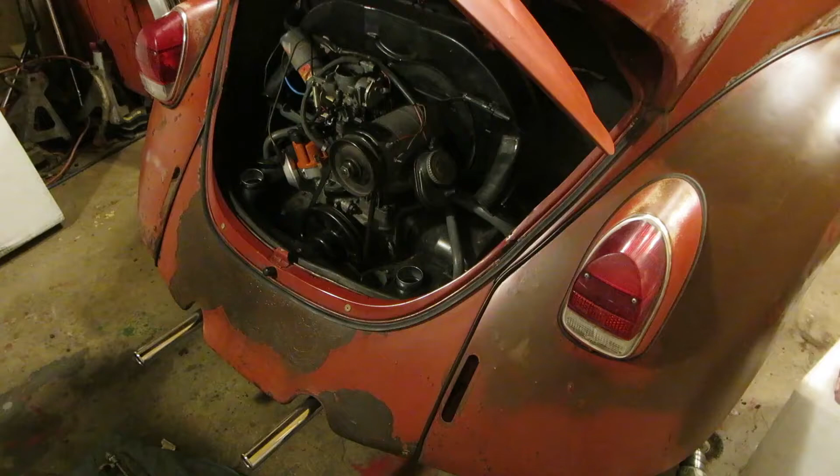This is sad, but it's funny because this is how things work in this garage. So I rebuilt this fuel pump, right? Okay, and I start the car up, and you can see the fuel going out the sides of it. That's funny right there. You gotta laugh at that, because if you cry at it, it'll make you really depressed.

So I took it all apart, right? And I lightly sanded both halves flat on a piece of flat steel, and I think they're going to require more machining. Maybe it was the beating I was giving it trying to get it apart. I don't know, but I think it was just warped, and the only thing that was holding it together was the fact that it was warped. I don't know, I don't know.

So anyways, I couldn't make it work, so I just ordered another one from Bill. It'll be here in a few days, I'll show you when I get it. But in the meantime, let's clean up this giant mess, and we'll start working on the bumper.

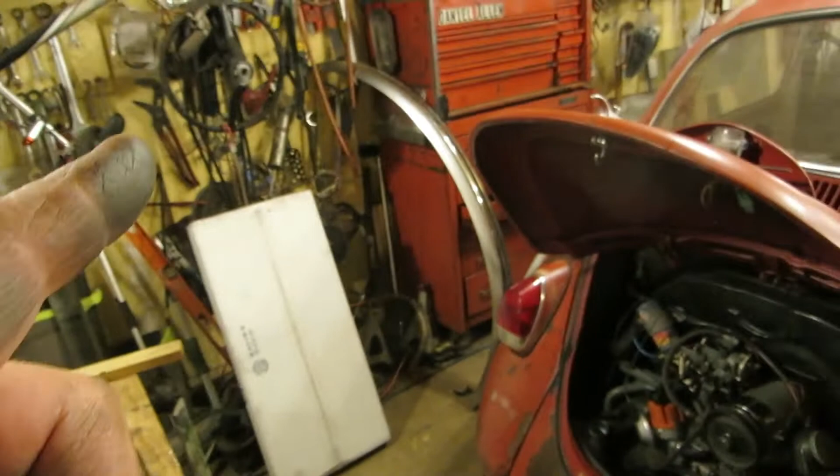And I've got a box that came today, Sunday, if you can believe it, from Wolfsburg. All right, this bumper here, I'm mistaken, it is not German, and you can tell just by how flimsy it is. The front bumper, however, is German, because it's considerably thicker, a lot better quality than this.

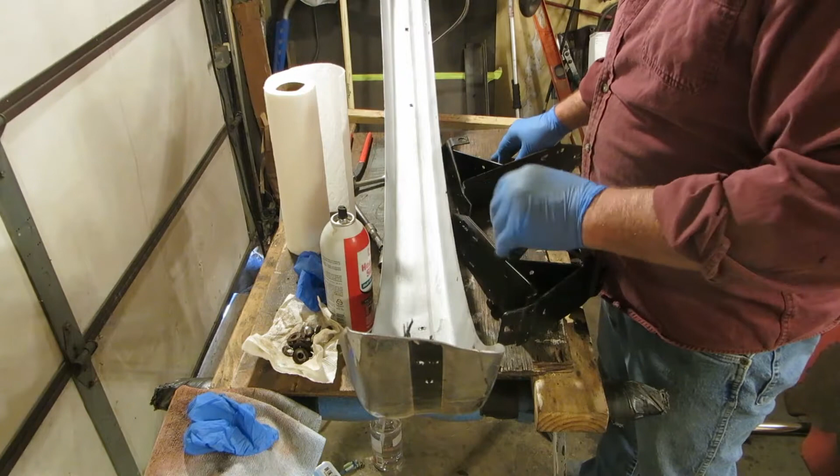This is just very light, it's almost like a piece of material for a fender. It's just nothing, there's nothing there. You would think it would be some thick stuff like this, and it's not. It just is not.

I guess it acts as... I don't know what it acts as, but I do have original German brackets. They got VW part numbers on them, and you can tell because it has the tow hook. So we're going to put this thing together, and we're going to put it on the car.

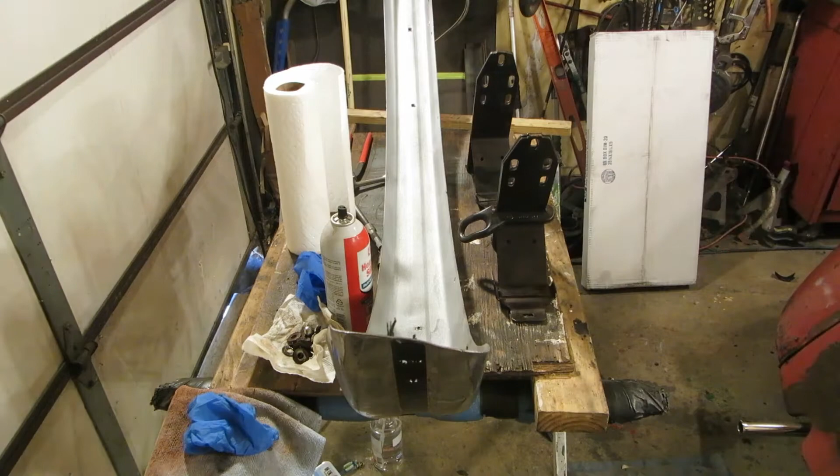It's pretty simple, just bolt it together, so let's get that done. Got the bumper on.

So nothing special about it. It fits like an aftermarket bumper though, like crap. No, it was alright, it wasn't bad.

Alright, we'll open up our Wolfsburg West box and see what we got here. Oh, I just sliced through the precious rubber. It's probably full of peanuts.

Wolfsburg was $4 cheaper on these, and they say they're German on the chrome pieces, and they say they're German. So I'm just looking and seeing if they're all dented up. Oh, they look pretty good.

Doesn't have any hole here for my screw up top. That doesn't surprise me, that I would have to take and make it work. What's it say here? Well, it's stamped. It's stamped made in Germany, well, which is good.

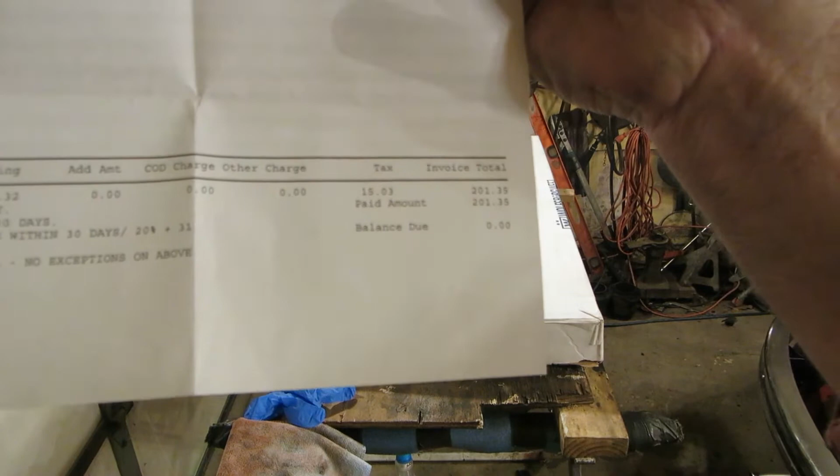Yup, everything there. Look at that price, yeah, for those little parts. $201.35, jeez. Okay, since I got my parts from Wolfsburg, I'm going to start putting my door together.

The first thing I'm going to put on is this molding right here. And it has clips, and the clips slide, so you have to get them into the door, all the while trying to get this piece lined up. It's kind of hard to do, but you can do it, so I trust you can.

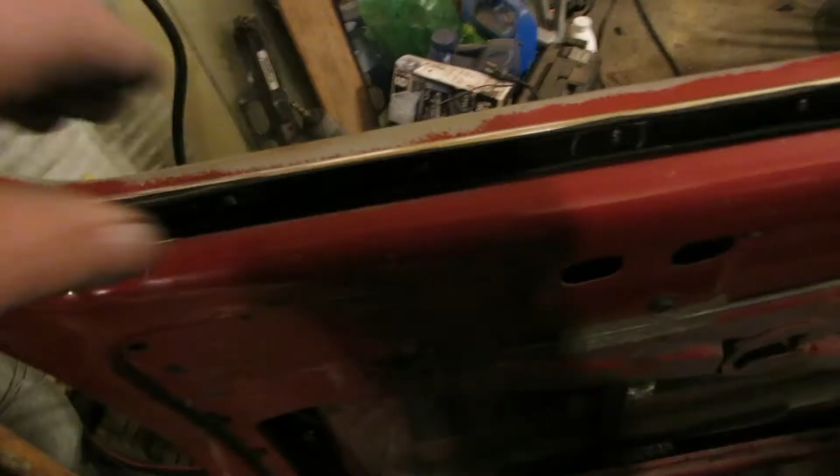It's real important to get this pushed in there as much as you can, because you don't want your glass rolling up and catching this. So tuck that in. Okay, you see when you get it tucked up in there, you have holes here, and those go for the clips. So we'll get this all tucked up in there, and I'll have to look at this screw hole, because there's no screw hole here, but there's a screw that goes up there also.

So let's get that all tucked up in place and the clips on.

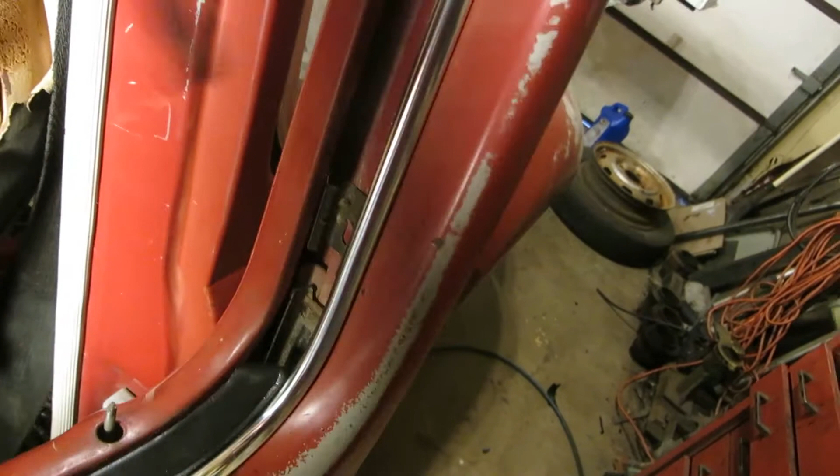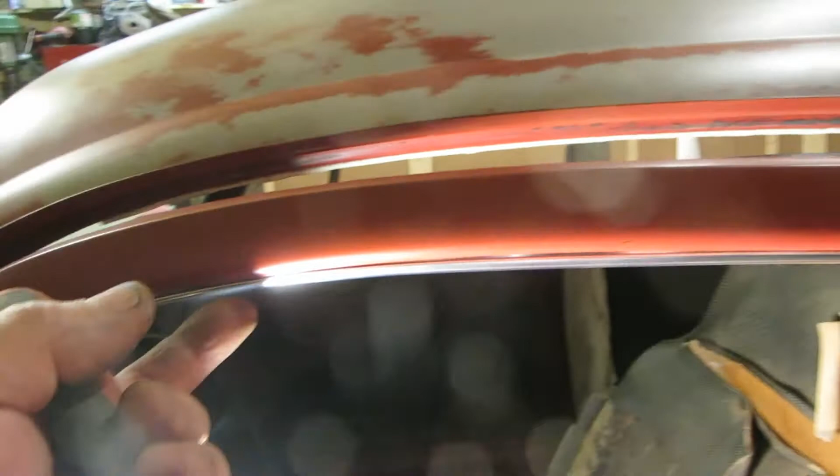Okay, these little clips, I don't think it matters which way they go, up or down. I'm doing them down because of gravity, so they can't shake out. The profile on either side is the same for the molding to stick into, and your chrome molding up here is fine. I've got to put my screw up here, but I think we're all done with that. It'll be too much of a pain finding that screw that goes up in there. The vent's going to hold it in place, so I'm not messing with it.

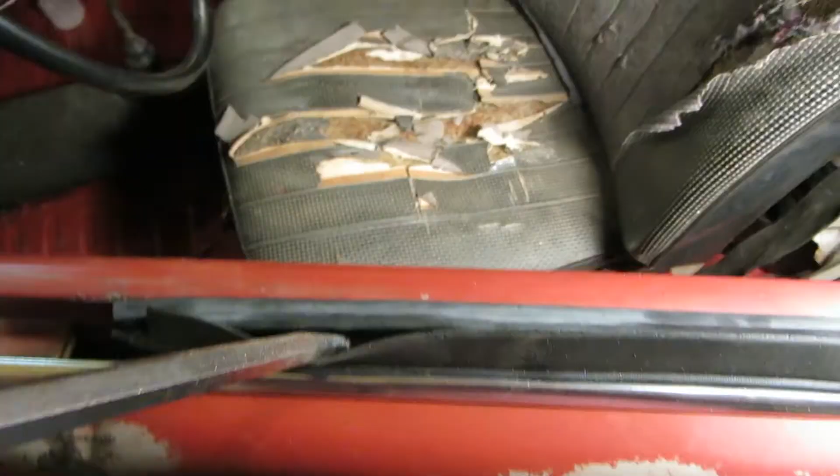Alright, if you use a flat screwdriver, you can clip these in place. They clip in really hard. So they did clip in though, so we're good.

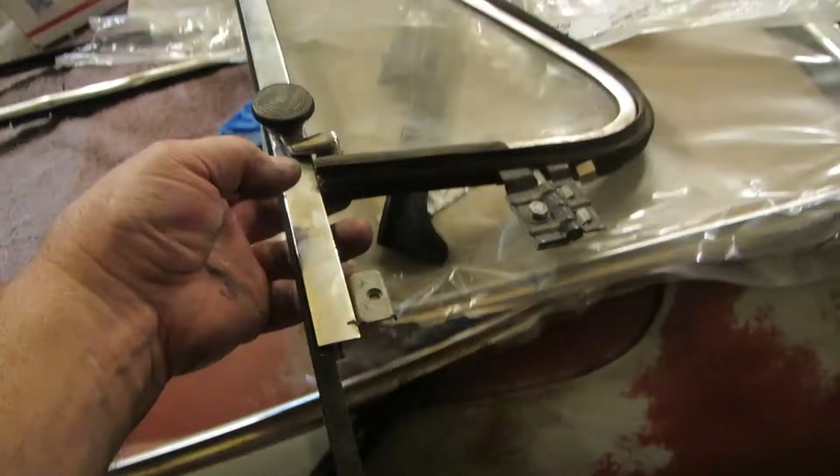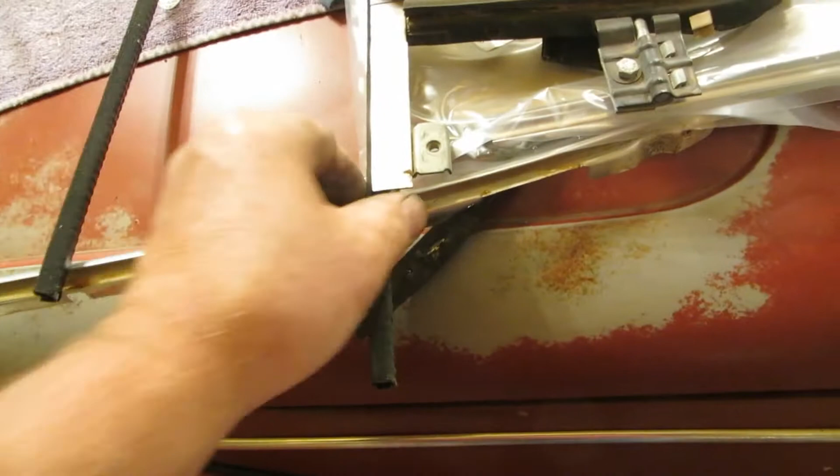Now we'll put our vent in. This is our better vent glass, and the only thing I did to this is I put a new channel in it, channel for the other side, and they've got like a little gummy surface. As long as you've got it clean and everything, the window rolling up and down is not going to move that, so you can just kind of press it in there and she works fine.

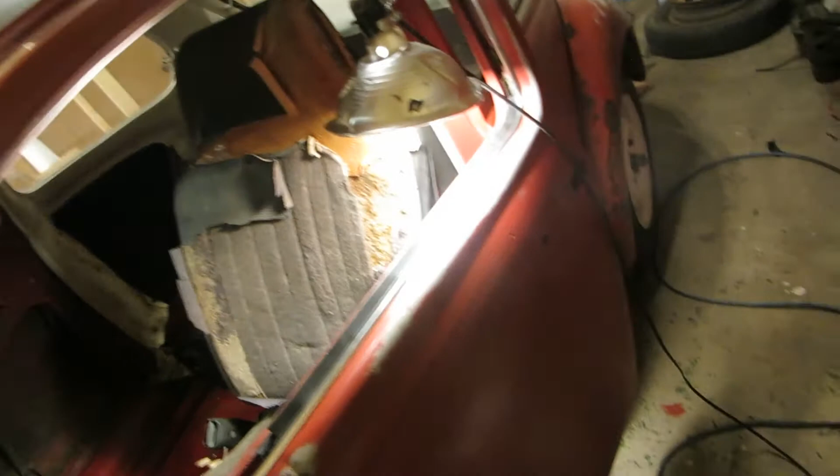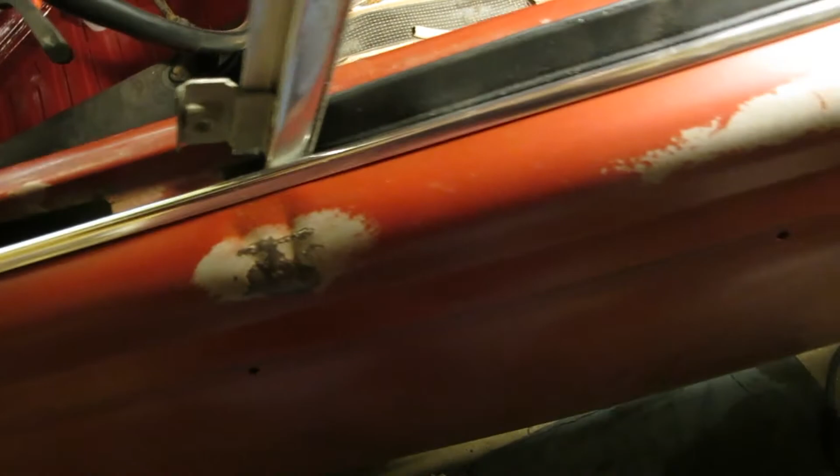And then we'll flip it around and go right there. I'm going to need two hands to do this, but we're going to kind of do one of these numbers. Careful not to rip up your rubber. So I tried to put it down in here and it just pushes this rubber away, so I've put a pair of pliers down there. It's just kind of a wedge - a wedge of wood would work just fine. I just grabbed what I had, and we'll be able to get that down there without pushing these rubber pieces away, and then when we pull it out, the door will come back together. We didn't bend it or anything, we're just kind of opening it up a little bit.

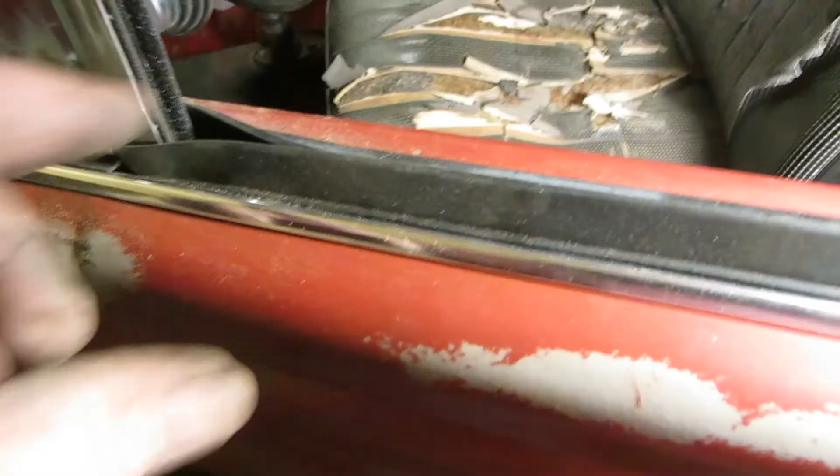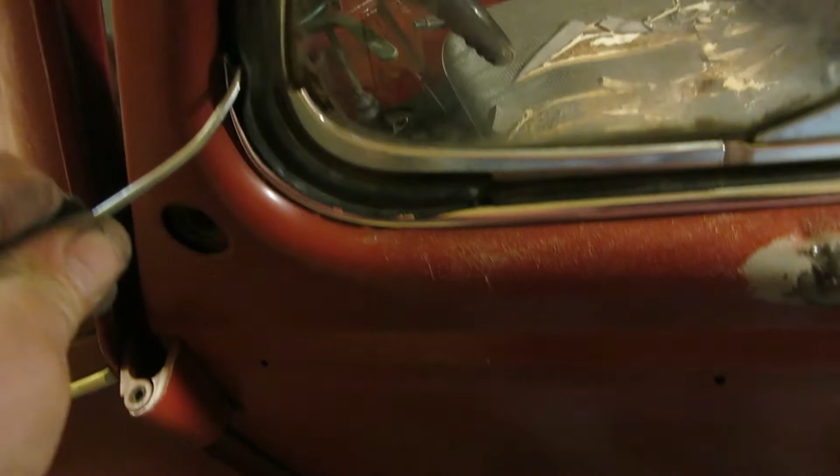Alright, there's a felt channel right there, and you want to make sure you get this metal piece on the felt channel on the outside of this. Sometimes they stick on the inside, so if you bring it up a little bit farther and fold these rubber pieces kind of out of the way with your wedge in here, you can kind of slip things down and then pop it over. Then I had another problem also with this metal molding, this chrome piece, and what I was doing is I was holding it with a hook while I was tapping this in. So, but we do have this in.

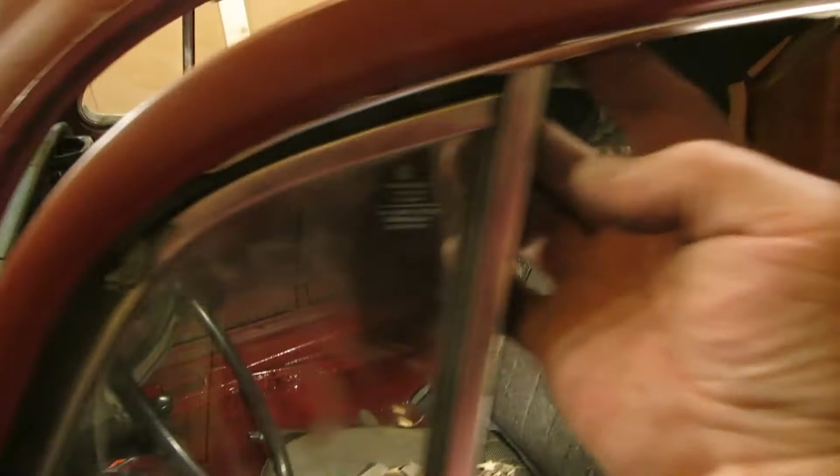And there will be a screw that goes up in there, so we'll put that screw up there, and then I can't go any farther until I get a piece of molding, which is the window channel. So once I get the window channel, then I can put that in there. Window goes up and down, I can even put the door panel on it. I'm thrilled. Well, it looks like it's time for another camera - this one's got a scratch on the lens now.

Okay, you put your vent glass in, right? And you tried to adjust it a little bit, maybe pushed it in or something like that, and the glass was loose, so you took the glass out of it. Okay, the glass came out of it. Don't freak out, okay, that's number one. Don't freak out.

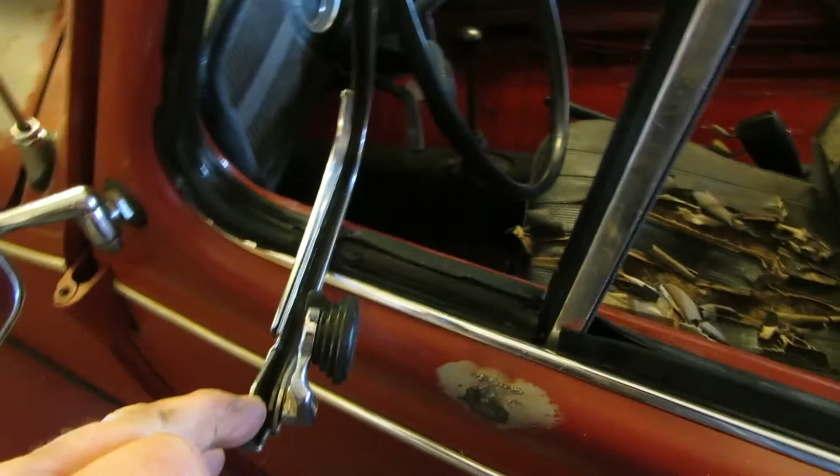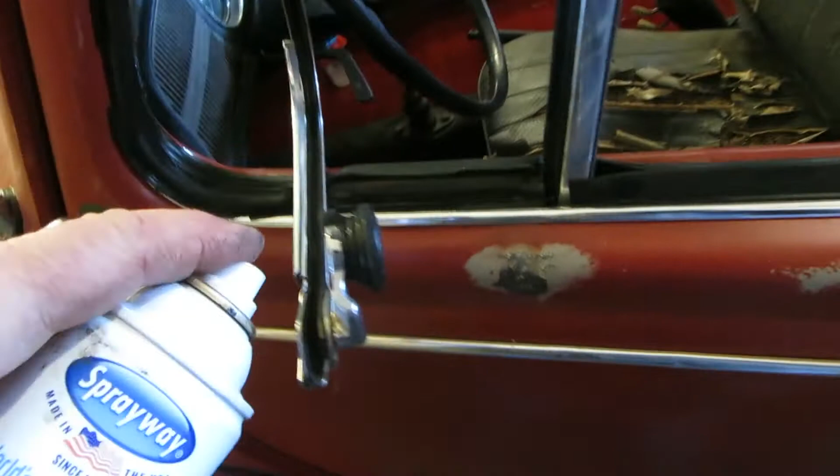Okay, what you want to do is - do not, I repeat, do not remove the packing. Wolfsburg sells new packing for it - drive that aluminum vent onto that new packing. Yeah, that's a good idea. Do not remove the packing from the inside of here. Okay, just take yourself a Q-tip and clean it out, alright? Clean it out, you get a dauber or a Q-tip or something and clean it out.

Okay, we're going to clean this and let it dry, and I'll show you what to do next.

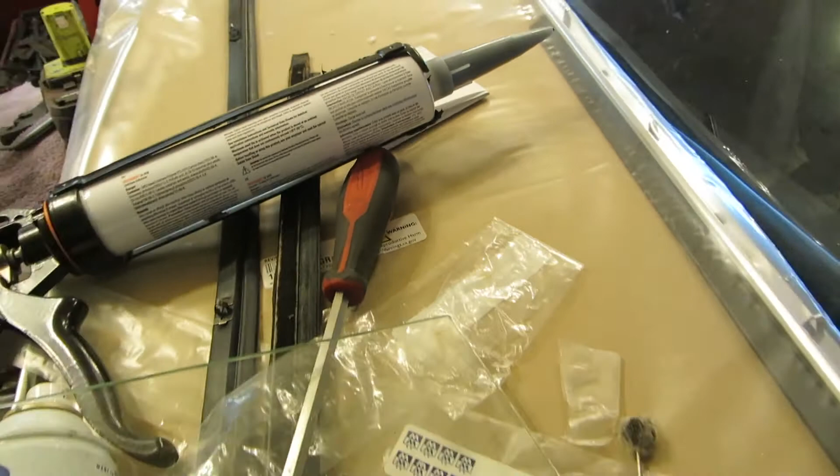Okay, once you get that warm and dry, you can squeeze out a bead of glue on your glass. That's too much, so I'm going to have to scrape a little bit off - you want just a little coating. You can use urethane or silicone on this. If you want to use urethane, use yourself a very small schnozzle - that's S-C-H-N-O-Z-Z-L-E, to keep with the German theme. If you do not have any urethane and want to use urethane, go to your local glass shop and they'll have a bunch of these tubes in the trash with a little bit left in the end. Cut the end of it off and use a Q-tip to apply it on there.

Doesn't need to be a lot, just a little skim, and then we're going to slide it in there. The reason you don't want to put a lot in there is because you won't be able to push it where it will spooge out enough, and the glass will be sticking out of the edge and it won't shut right. So you want to use the smallest amount you can to avoid the spooge and get the glass fixed in there. Heat is your friend. Get it as clean as you can. Okay, let's put it in there.

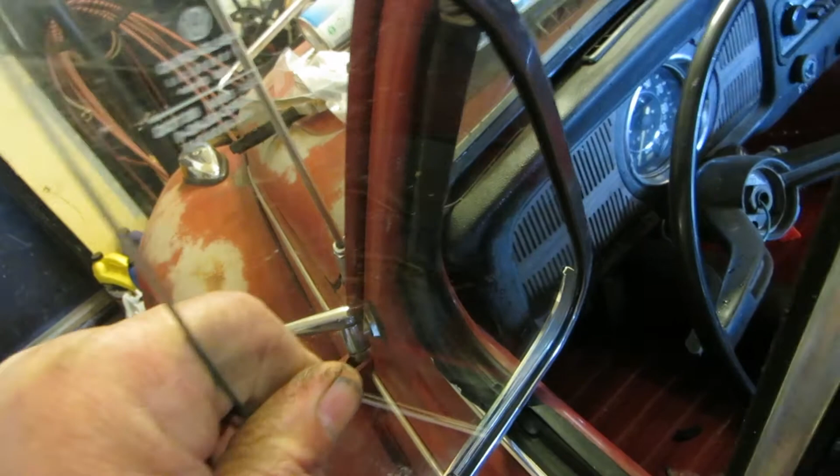Scallop! Tee-hee-hee!

Okay, you're going to want to wipe that off, and that part right there, and then close it. You know, it's hard to do both at the same time.

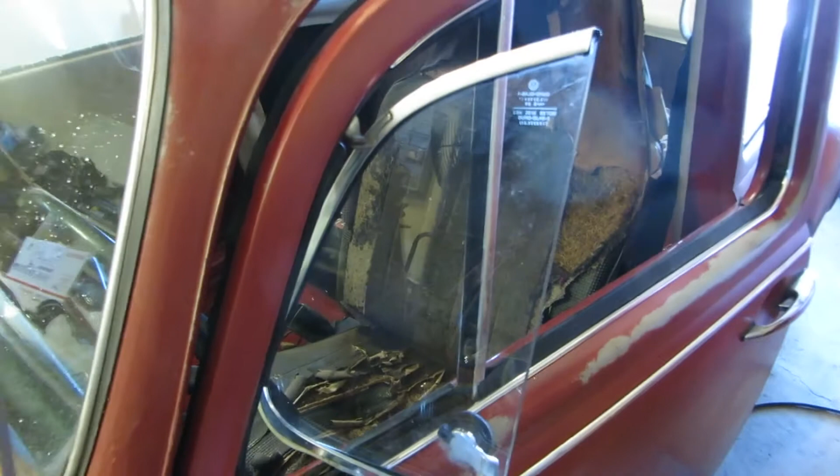The scallop tee-hee-hee came from way back. We had a glass company I worked for. They had glued-in glass, and they wanted us to scrape it all the way down to the body, right down to the metal, and then set the glass in with butyl and silicone. Jesus. And after you scrape the metal, a year later the customer comes back saying my windshield leaks. Yeah, because there's no pinch weld underneath it anymore from the silicone eating it all up.

So, wait for the truck to go by.

So we would scalp the windshields, and to scalp a windshield was to cut the glass out. You'd have your original polysulfide or urethane, however thick it was on the pinch weld, which set the height of the glass perfectly. And it had the original attachment to the body, and as long as it hadn't gotten eaten up with rust, it was perfect. It's perfectly acceptable to run a bead of urethane over that, because urethane sticks to urethane or polysulfide very well, and it sticks to glass very well. So you just run a bead of urethane, stick the glass in place, put your moldings on, Bob's your uncle. Really simple. Scalp. Well, our manager hated that.

He hated the idea of us doing something like that. It was completely verboten. So to piss him off, when we got done setting the glass, it was hey, we scalped that one, Al. It got to where we'd just go, scallop, tee-hee-hee. Oh well, anyway, you'd have to be there, I guess.

And when the wife comes out and starts talking to you about stuff and you're yes-ma'aming and no-ma'aming her, that is not the time to be putting these little chrome pieces in, because mine was underneath there and I jammed the vent up into it and bent it. So yeah, oh, what are you going to do? Well, it goes with the theme of the vehicle.

So we're okay there. We've got our rubber pieces on both doors, and our vents operate very nicely. Of course, they'll whistle probably because they have the original setup, but you know, I did all the work to this car, and the vents still whistle on it too.

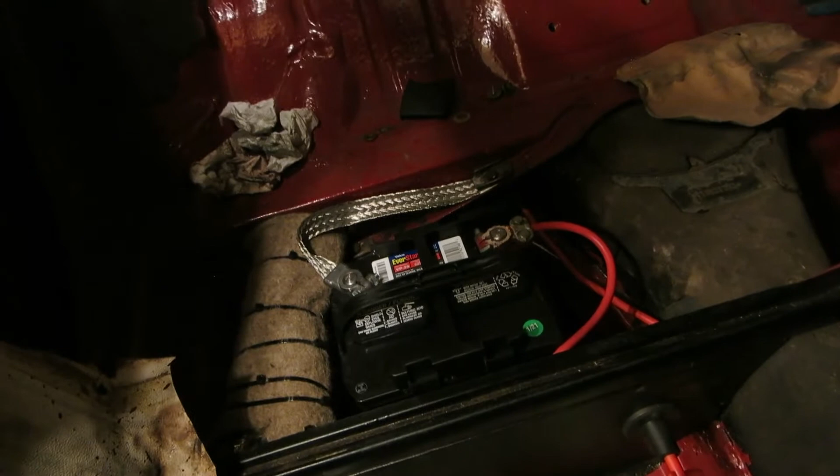So, okay, some things I want to show you. I went down to Wham-A-Lart and I bought this for $48. It's an EverStart battery, and I wired it all in, and boop, there you go. That is an $8 piece from Rock Auto.

I had to fidget with it a bit in order to make it work. A lot of people said, yeah, you got to fidget with them, blah, blah, blah. If you buy one from Wolfsburg, you don't have to. Wolfsburg's about $32, I think. So $8 and that lights up versus $32 and it lights up.

I'll show you this - this confused me for a long time too. You don't have the key on, you don't have the fuse box energized, that's why it's not working. It doesn't work perfectly, but it works now, and I only paid $10 for that, if not $5. So it won't work - the kids can't push it - you have to have the fuse box energized.

That not having an oil light on reminds me, I need to put a connector on there, because while I was taking the fuel pump off, I noticed the wire was very thin, and I'll have to put a connector on it. Now, the fuel pump that was spritzing gasoline all over my new distributor, I took it off and sent it to Bill to have him fix it. He said he'd do it for $50 - can't beat that, because he said he'd be able to save the gaskets on it, which is fine with me. I'll have a good spare, but I also ordered a new one. I'm going to fix that wire on that oil pressure switch, put a new connector on it.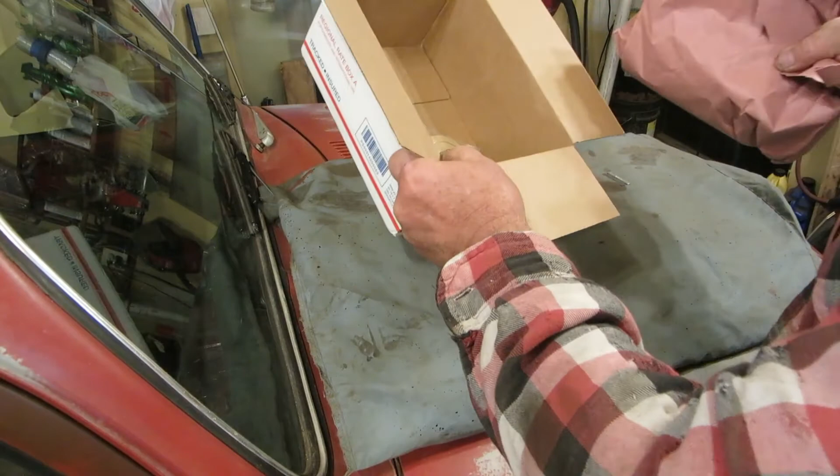So I had mine rebuilt, but that's being done right now. In the meantime, I just bought another one from Bill.

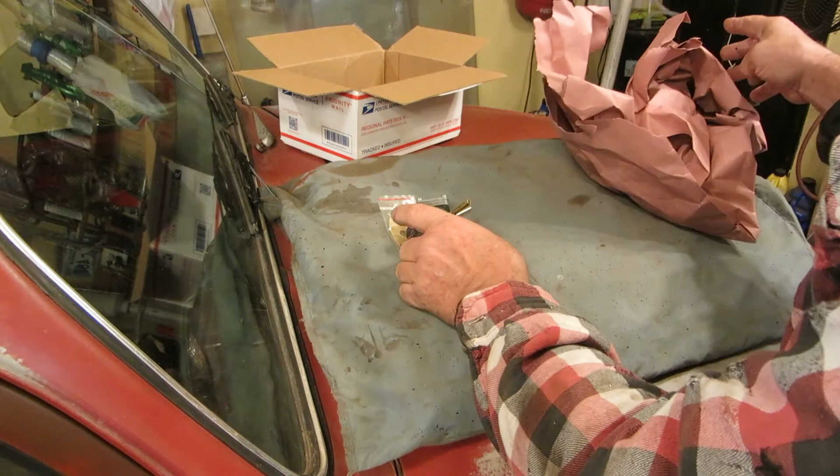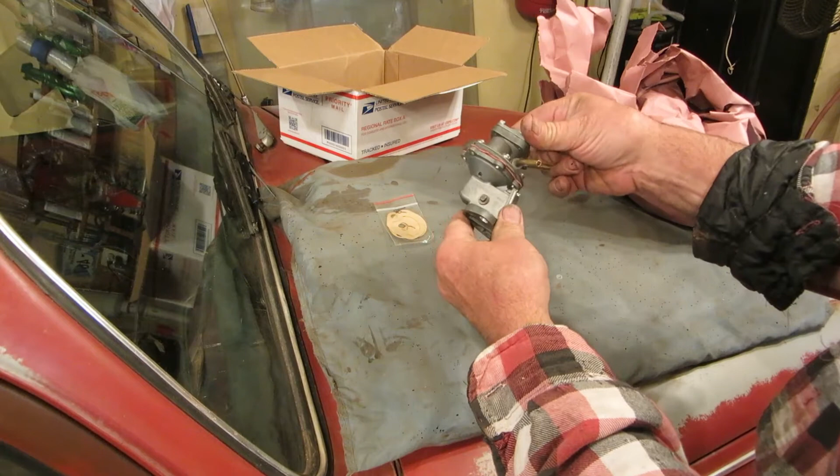Oh my God, look at that. Oh geez, it's like sterile. Isn't that crazy? Even the screws are plated. Look at that. Wow. That's a piece of work there. Isn't that beautiful? Beautiful, beautiful.

Okay, we're going to get some grease in there and probably prime it a little bit, and we'll put it on the car.

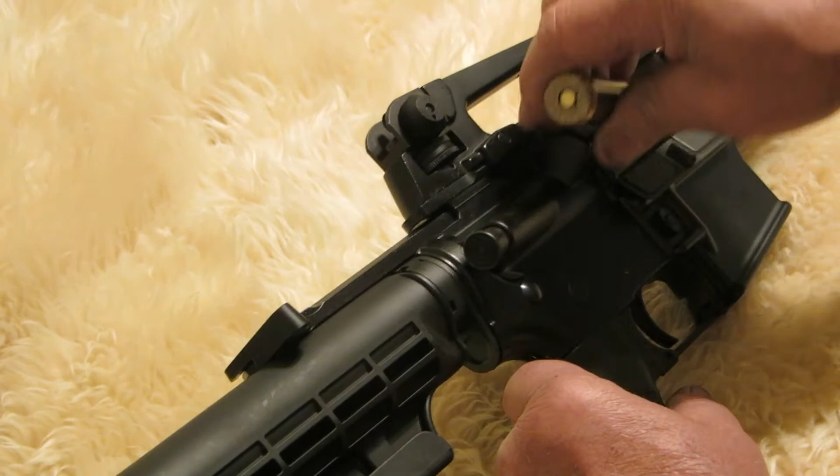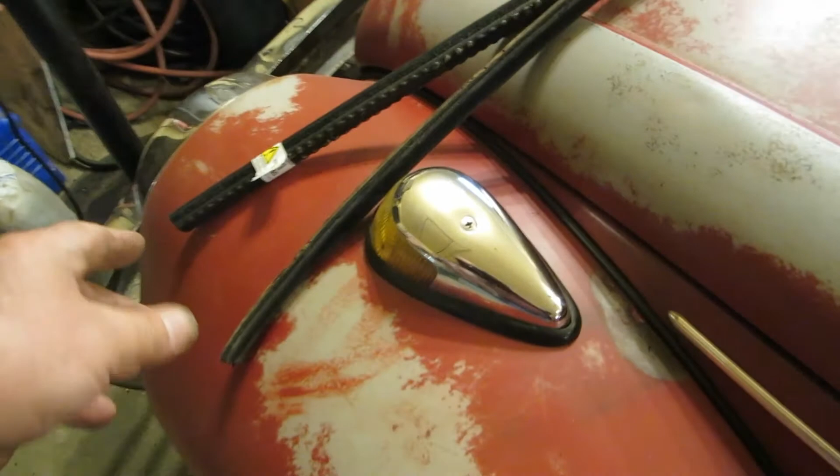They seem to be about the correct size, and so you can have a little bit too much in the back of your door. So let's put these in. You can pull these little rubber pieces aside and slide this down here, and you can give it a little bend to make it work like this. The most important thing is this needs to not have a gap in it first.

Okay, so this is where you need to start. Essentially, you can slide it down, and it's coming out right here, but you can slide it down enough where you can start this up there, and you want to push it in as far as you can, and the little clips you have right here hold this all in place. So you just kind of finagle it all in place and then push it into the track here.

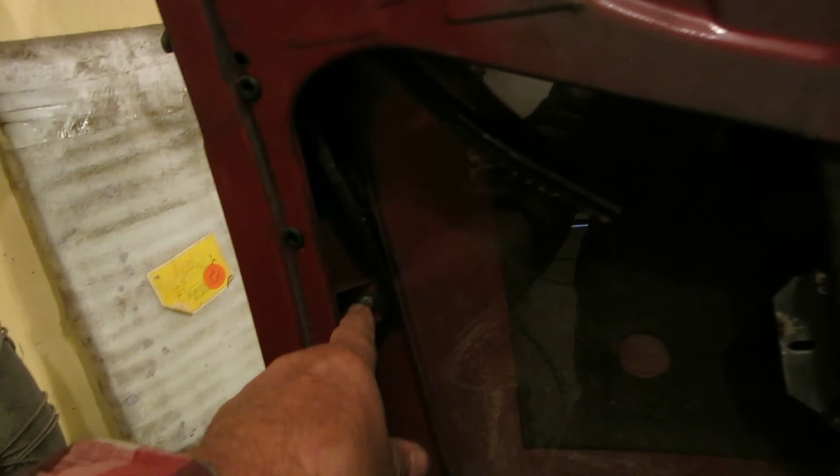Then we're going to take the bolt out of our track. Can't push it into the track unless the bolt's in. Take the bolt out, slide the track back a little bit, and get your glass located in the moldings, and then just kind of slide it up in place, bolt it up, crank it up, and then you should be good. So you can take yourself a sissy stick and stick it up in there like so, and a rubber hammer. And that will help set that channel into those clips.

I can live with that. Yeah. Sweet. Come on, Granny.

A breeze, a breeze. This car is just as tight as this car. You have to roll the windows down in order to shut them.

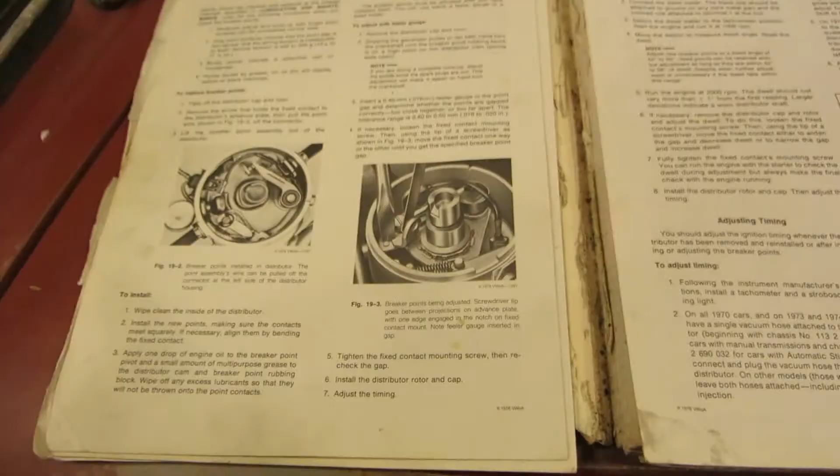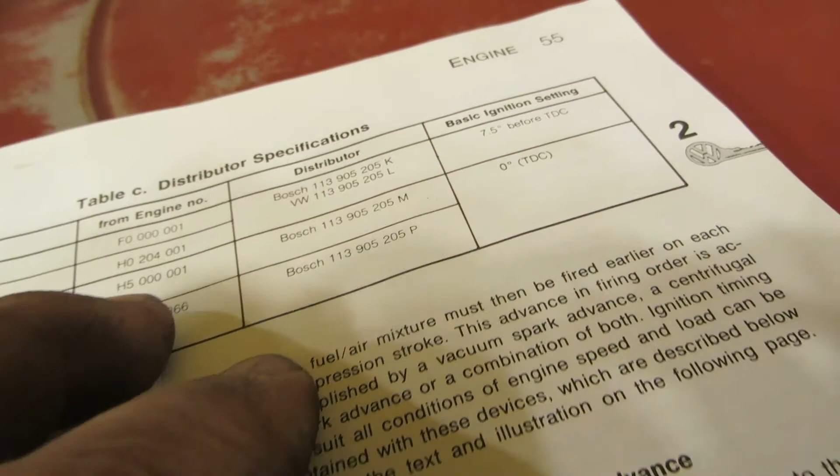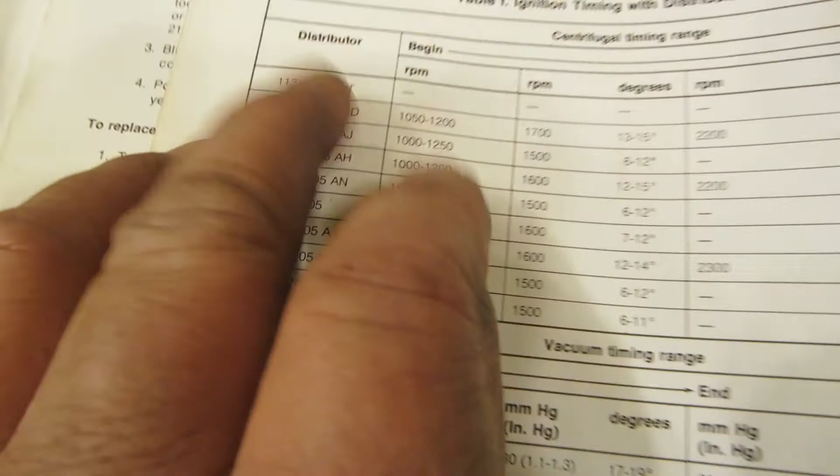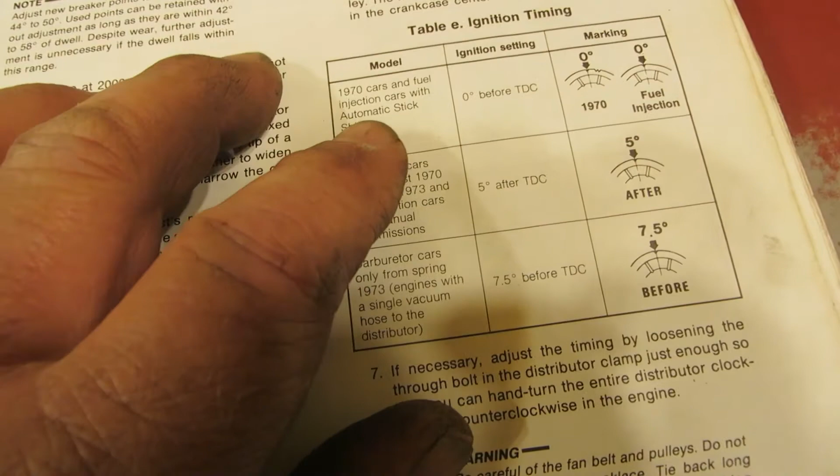Okay, this is a '69 car, but I have a 113905 205 T distributor. So you have to go, because it was built late in the year, into the Orange Book. And in the Orange Book, it does indeed show my distributor, but it doesn't necessarily give, like these, 0. But then it does say on '70 cars and fuel injected cars with automatic stick shift, 0 degrees.

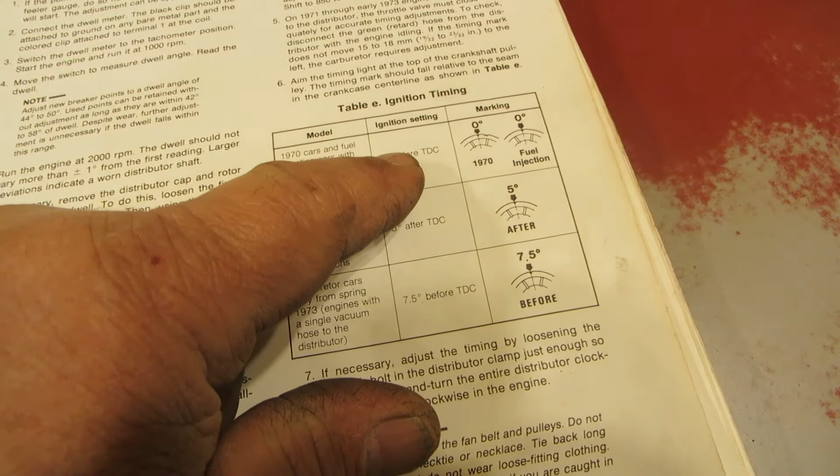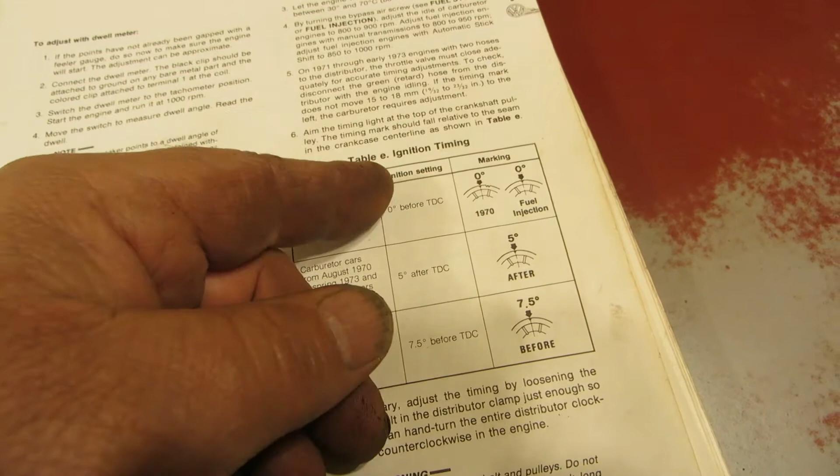So I'm going to go with a 3 marked pulley. I'm going to go all the way to the left because it has 3 marks on it. It has 0, 7.5, and 10. There's a reason why it's marked with 3. So I'm going to set it to 0, time this at 0.

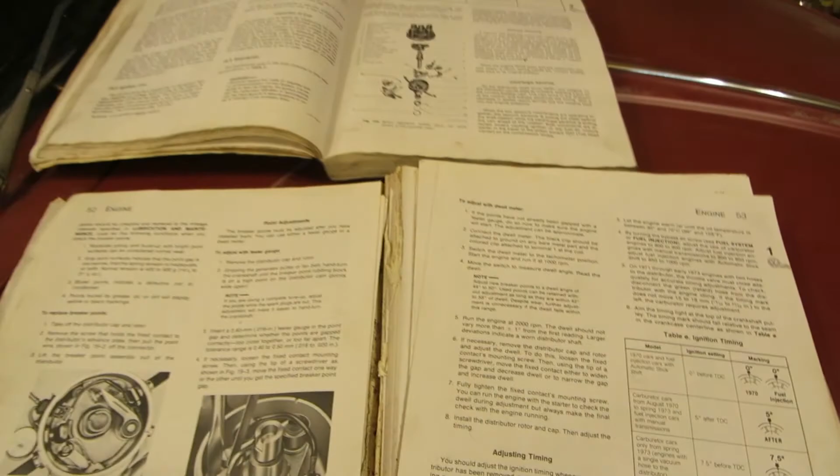Right on the money. It'll run a lot better when I get a different carburetor for it. Get the correct carburetor back on it. No fuel pump leaks. Beautiful job there. Very nice. Spot on. This electromagnetic deal doesn't work all the time. Kind of funny.